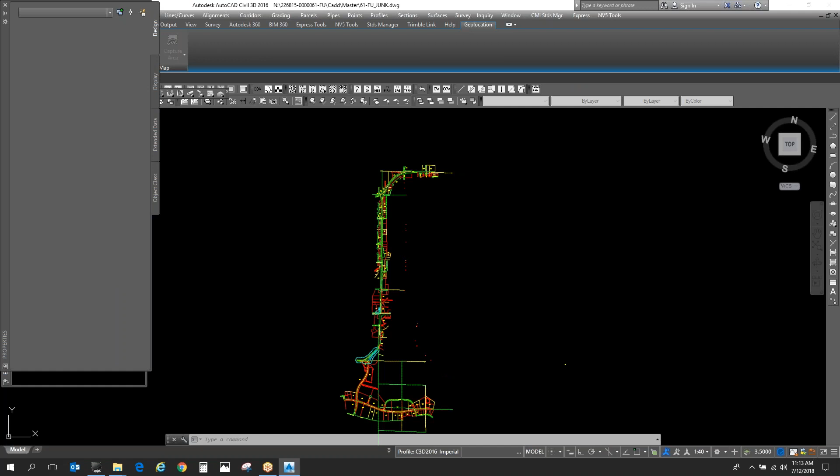Probably could have picked a simpler file to open, but. I just ran the batch file. You'll have to run it once for the settings to take hold, and then moving forward it will remember.

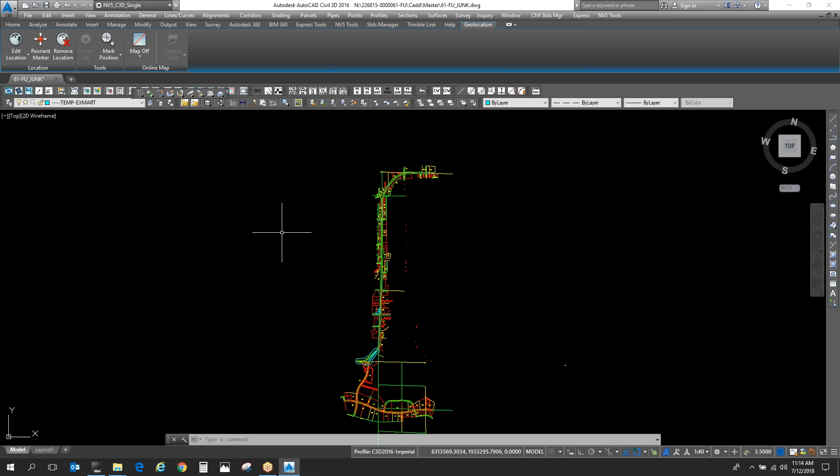So I'm going to close those real quick. One of the things that happens, hopefully, when I hit open, you'll notice that it opens to the folder location that my current drawing is in. Previously, it would default to some past folder you've been working in. This is new code I've incorporated. It will open to whatever folder you're currently in. That's pretty cool.

That'll help ensure we don't save over XREFs and put information in wrong folders. This is applicable to basically anything. Let me see where my note is. This works for XREFs, eTransmit, Sheetset, Save As, Open, and Publish commands. So it's a pretty useful list of things affected by this. If you go to publish something, when you go to Save As your file for a PDF, it should automatically go to the folder that you have your drawing open to. So those are all pretty useful things, hopefully.

That's just automatic? That's automatic. It's part of the startup code now, not the batch file, the actual startup inside AutoCAD.

Document control, there's a lot of things to discuss on this. Folder naming conventions - we want to keep the N drive as neat and uniform as possible, such as this project here that was created today. First thing to note is we don't want any -00. Second thing is anything not belonging to the San Diego office, in other words, anything not 2268, should be created on Panzura. So 262, that's a Northern California job, that should actually be on Panzura.

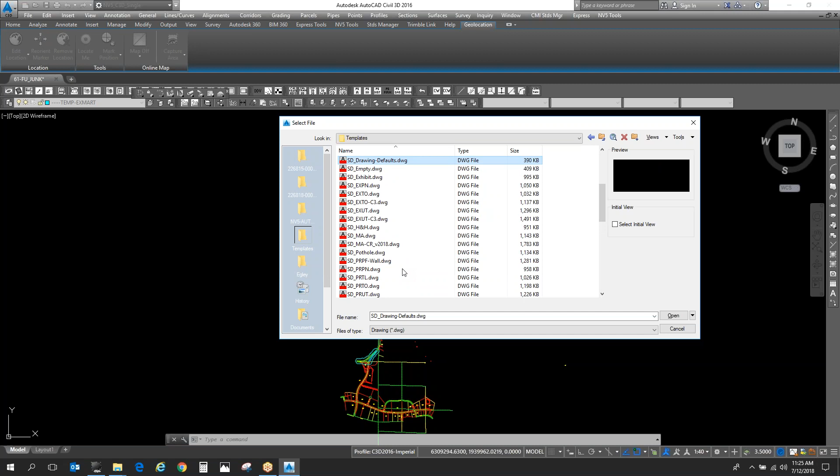So overhead transmission, like you guys are kind of used to, you'll kind of see a block matrix, especially initially, so that you guys understand what's populated in this template. We've got a lot of blocks, obviously, existing and proposed conditions for things.

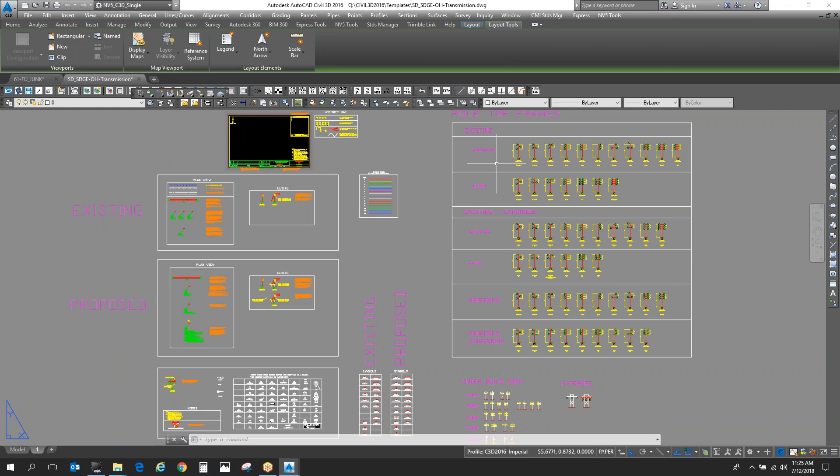All these are dynamic blocks, however, don't really use the dynamic properties for them. The reason why is because your annotation bubbles change, and the only way to accomplish that is to physically create a new block for it. It is a dynamic block, but if I change it to something, sometimes the callouts don't work as they should. So don't change the dynamic properties, just bring in the new block from your tool palette.

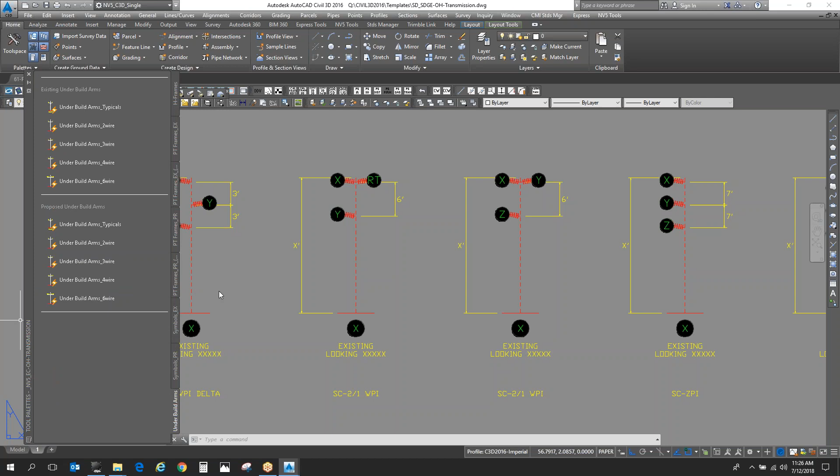So anytime there's a new template, there needs to be a new tool palette. So there's a new tool palette for overhead work. NV5 EC overhead transmission. I'll click on that, and here's all the new blocks for this type of work. We've got existing and proposed work or blocks for all these objects, symbols, underbuild arms, all that stuff. This is all new stuff that has been implemented in the last about 2 months. So new template for all overhead work.

Block updates. For those working on distribution design, there's been one update so far, and that's the repeater antenna via Marco. So feel free to use that and implement that. That's on your overhead distribution design.

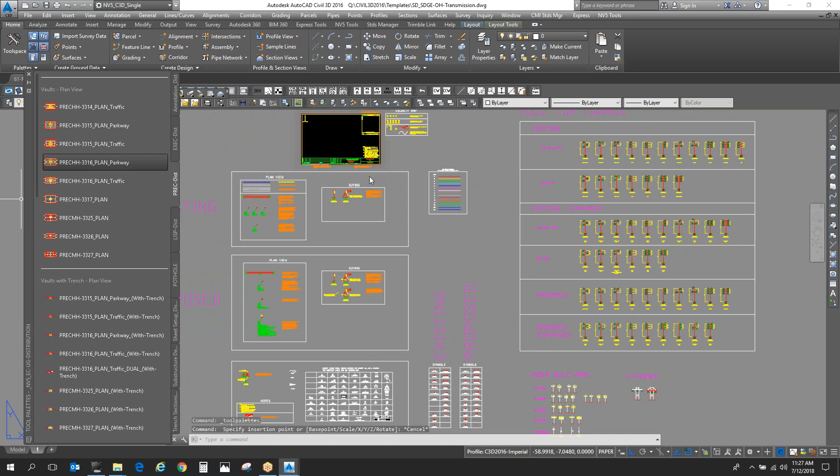For those working on underground, I'll go to underground distribution real quick. For your vaults, these have been completely kind of revamped and relooked at. I'll use the 16 because I like the 16 a little bit better. We're all aware that there's a difference between the parkway and the traffic lid. That's always fun to see different scales.

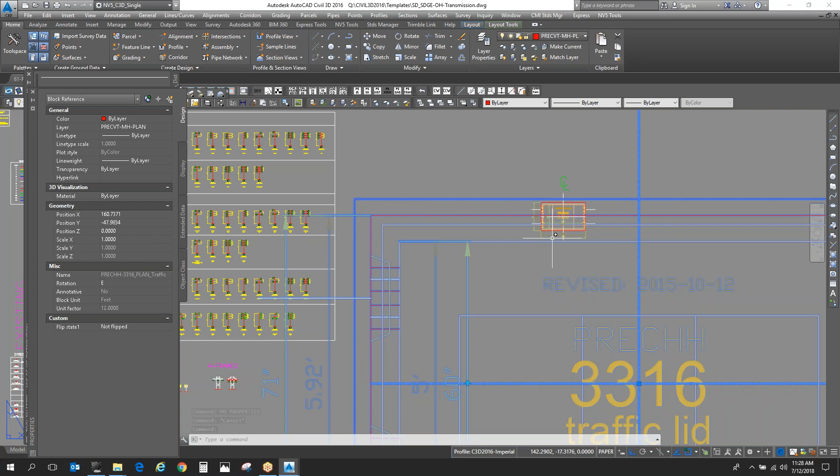No idea why that is. Oh, units are probably set incorrectly in this.

So you have a better block definition for these guys, with one being the parkway lid versus the traffic related lid, or rated lid. They look differently, and that is represented in the blocks now. Previously, it was not really represented. The only thing that was really represented within the traffic was the outer or the bigger top section. So now they're accurately reflecting the lid configuration. All right, so those have been updated.

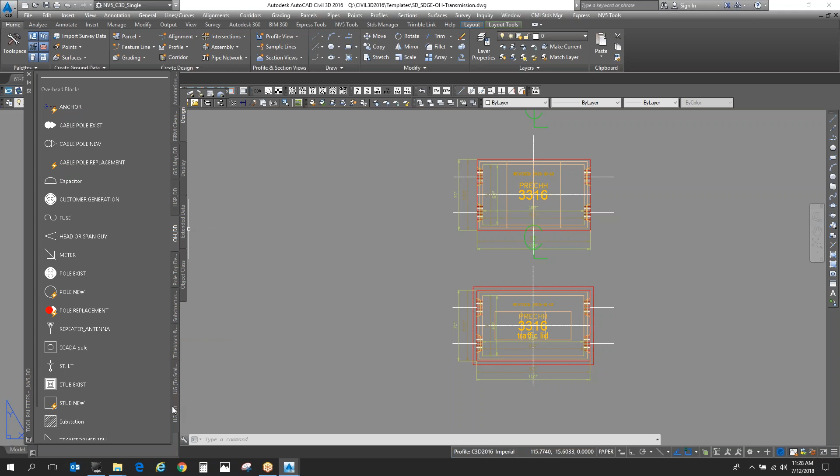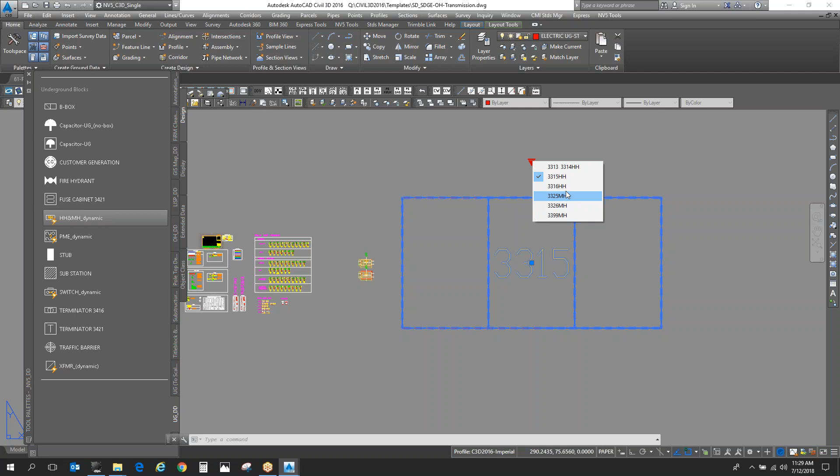For those working on the distribution, that block has been revised as well. We're still going to kind of not use the real blocks, just because SDGE doesn't really want to see those. But for your manhole or handhole and manhole designation, you'll notice one major change. The 15 and the 16 previously were one block, and they looked identical, and we were getting feedback from the client of, well, what is it? Is it a 15 or 16? So these are different visibility states now for the 15 and the 16. The 15 will basically have 2 lines representing three lid openings or structures, and the 16 will have 4 lid. So that's kind of the way SDGE wants to keep track of whether or not it's a 15 or a 16 vault. All right, so just be aware of that change moving forward.

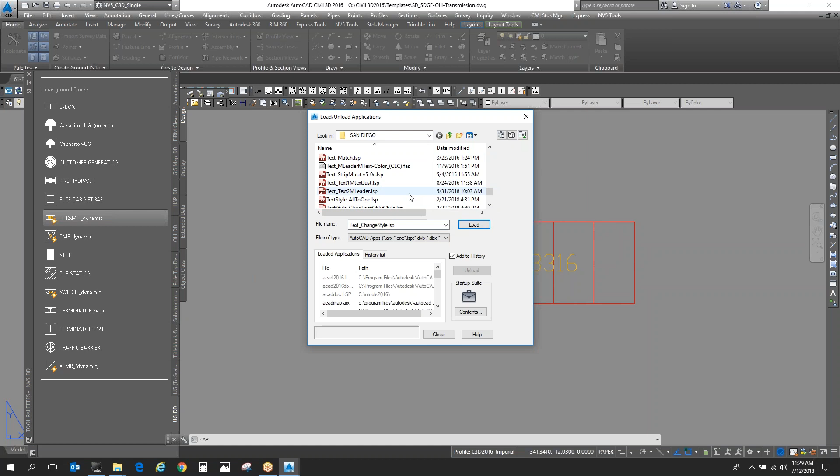There's a new LISP routine to discuss. So under AP, San Diego, this one is called text to M leader. So if we type AM, that's the command for it.

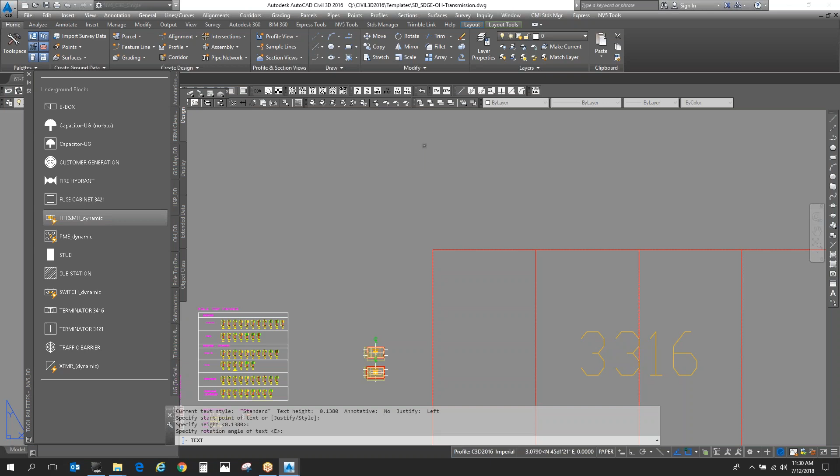Let's create some text first, that might be helpful. So there's my text, AM. All you have to do is select your text, right click, and now where do you want your M leader to start? We'll draw something like this. So it automatically converts that text and puts it inside a multi-leader. That can be pretty useful, especially when you're cleaning up somebody else's work that may not be done accurately or correctly. So rather than drawing a leader to that text, you just simply create an M leader using this LISP routine. So the name is Text to M leader, and the command is AM.

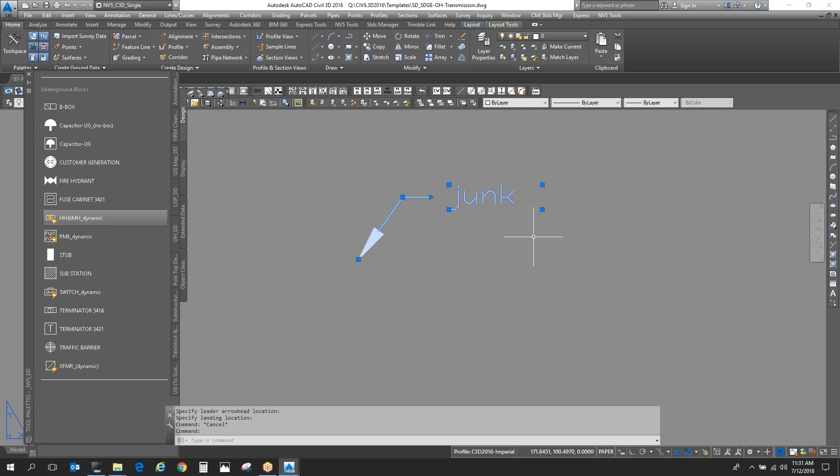So like I've been doing here as of late, we've got a couple people to reward for their contributions for helping move NV5 forward, especially for CAD.

So the first one is going to go to Kenneth Months. So what did he do? Good question, right? What does that guy ever do?

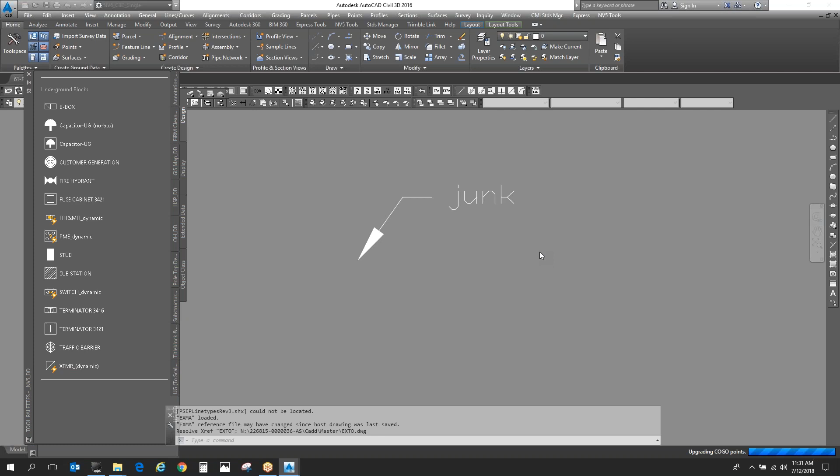A couple months ago, we noticed some errors in the profile labels for gas, originally pointed out by Taewei. I said I fixed them, and I didn't fix them 100%. Kenneth was kind enough to point out that mistake where the code did not account for every situation we would run into. It was ignoring what happens if the profile is flat or doesn't have a slope. My code did not account for that, so it was not actually factoring or labeling things correctly.

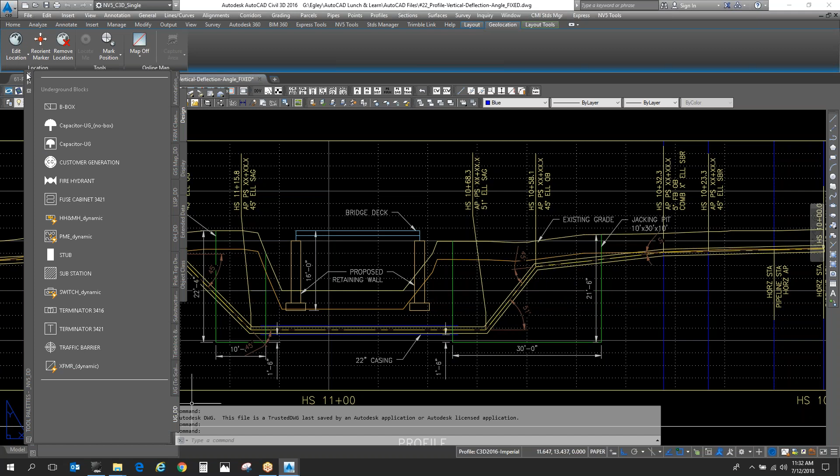So he pointed that out, and I was able to analyze that and come up with code to fix it. I believe the code will handle all situations you can possibly throw at it, and it will label things correctly. So the two things we're talking about are the vertical deflection angle, as well as the overbend and sag labels. All that is automatic now for any situation you run into.

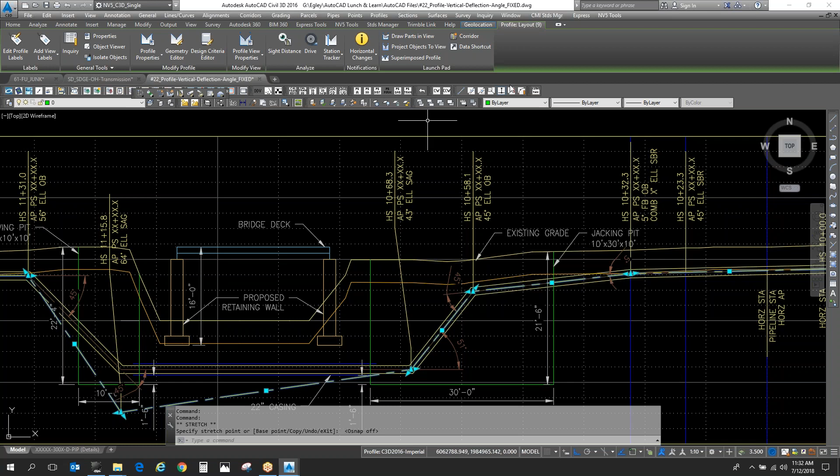So if we change this, still a sag. If I'm looking at this one, still a sag. If I change it like this, still a sag. Let's get crazy - that becomes a sag and that becomes an overbend. So all that stuff has been corrected to account for zero slopes.

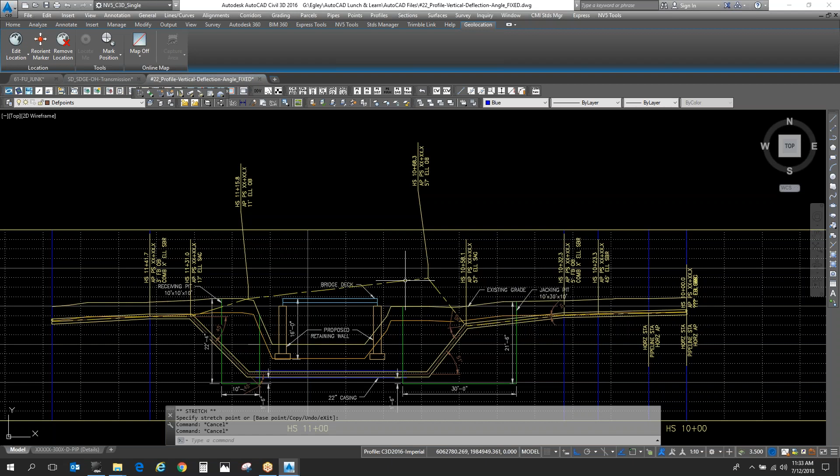There was also some issue with the vertical angle itself. For things that approached zero angles, it was not calculating correctly. So that code has been completely revised, and an email has been sent out to the gas group accordingly. If you're working on anything prior to 2 weeks ago, you'll need to bring those expressions into your drawing for them to be updated, and that has to be done manually, unfortunately.

There isn't a way to replace expressions in Civil 3D yet, so they have to be manually copied. So that's the first one. Good job, Kenneth.

The second one goes to a new employee. I absolutely love talking to new employees, new hires to NV5, because with them comes their experience at different companies and a fresh look at the way we do things here at NV5. So this one goes to Miguel Gonzalez.

Hopefully I can con him into doing a lunch and learn. Oh, and it's not loaded on this machine, unfortunately. Oh, you noticed. Oh, you noticed. Wow, man.

So there has been one of the most annoying things in terms of civil engineering, more on the actual civil engineering side with municipals and public works and whatnot, and that's the use of construction notes. More cities and agencies are requiring to only show the list of construction notes that are applicable to that certain viewport. This is a procedure that takes days of mindless drafting and cleanup.

A couple new things. A month or two ago, we had a question regarding how to bring in SDGE GIS data. There is now a workflow document detailing those procedures, under the CAD Manual, Section G, SDGE GIS import.

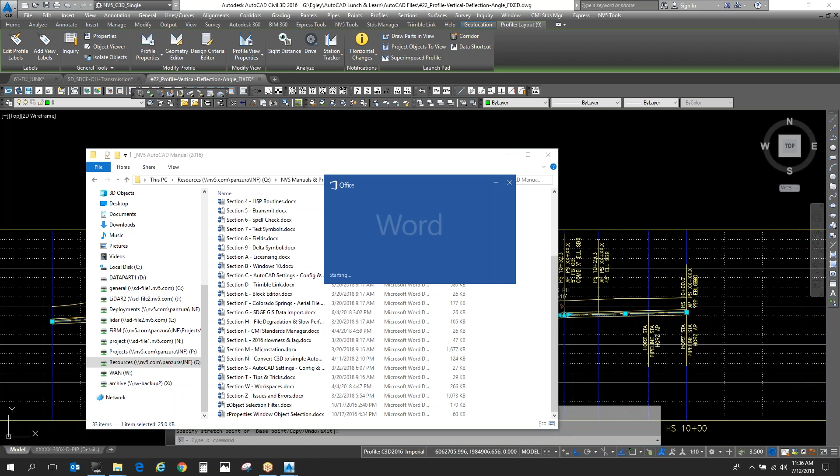So if you find yourself needing to know how to bring in SDGE GIS data, this is the document you can reference. It goes through a 9-step process on what those steps look like. The main thing is it deals with the coordinate system and the translation of that information into the correct coordinate zone. That's probably the biggest issue with our GIS data that we import. So follow this example and it will update that information for you, which is great.

I'm not going to cover pipe labels.

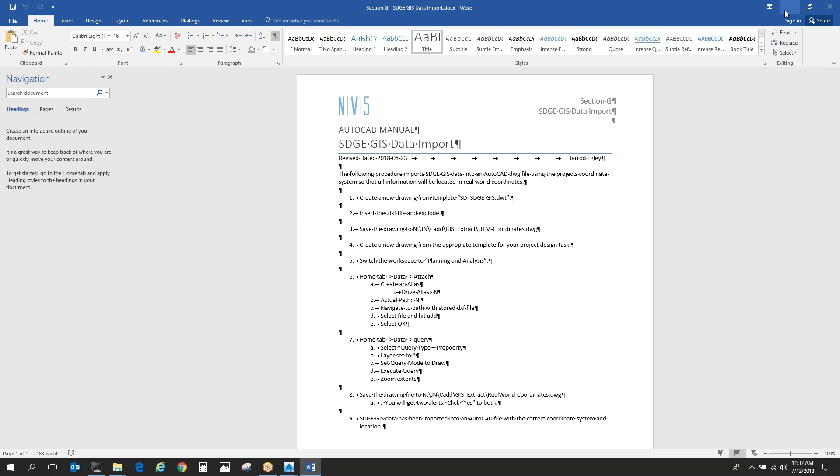One other thing that I'll cover before talking a little bit about Panzura - this will probably be a separate Lunch and Learn - be aware that anytime you bring in points, your points are going to come in according to whatever point code description key set you have set current. So to figure that out, under your tool space settings tab, point description key sets, this is the order in which it will use to set all your point data. That comes from how descriptions are handled and what layer the point gets put on.

I'm currently in a gas profile or gas drawing, so we see the description key sets for the gas group. Let me switch to this one. This is kind of maybe more typical, this is a mapping one. So any block marker has an MA behind it, that's a code set to bring in markers for just the mapping entities - let's say iron pipes, monuments, that kind of stuff. If it has something applicable to mapping, it's going to bring that in as a block, so the point marker is going to display as the appropriate block.

So when we right click on this and go to properties, lo and behold, the point markers are on top. So if we bring in a point that has a monument, it's going to be represented by the block in the point marker. If you don't want that, or if you do want that and you only want to show the blocks, you can move that above it, and it's only going to show the data that uses a block as the symbol. The reason why this is important is because then we can extract those blocks from the point and start building our base map files.

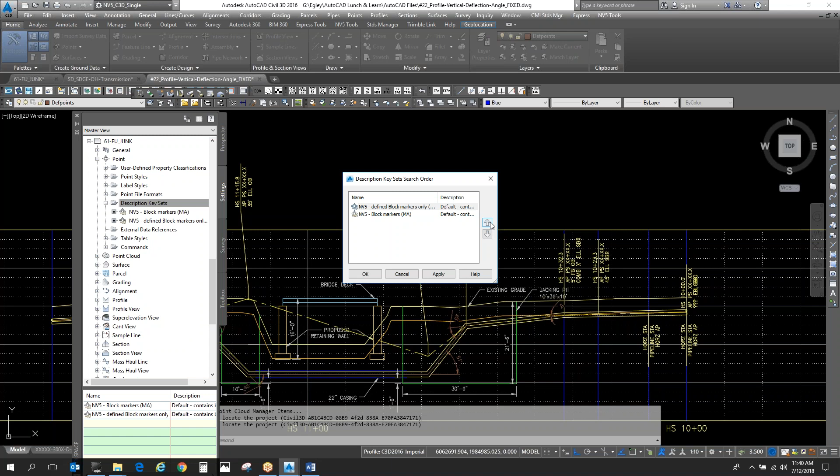And with that, I'm going to end the lunch and learn and just talk a little bit about Panzura.

Do we have any firm people? One person working on firm. Three people working on firm.

Yes, so this is kind of the way our drive letters are currently set up. Deployments is on K, which is Panzura. Firm is 100% on Panzura. N, which is our projects drive, is not on Panzura.

I should say any project that is started here at 2268, which is San Diego, and is not being shared with other offices, still resides on your N drive. P drive is the projects for Panzura. It is interconnected to the other INF offices. Those currently on Panzura include Sacramento, San Jose, and Fresno. Manteca is not currently on Panzura.

This will become more important for the power group as we continue to expand and incorporate Sebesta's offices. They will be coming into the Power Delivery Group 1, Sebesta. Their data actually gets populated to Panzura this weekend, and then their data will move. The data will be segregated with the projects in the Power Delivery Group to this folder. So more and more projects are going to be populated to Panzura, and more of you will start to work on Panzura.